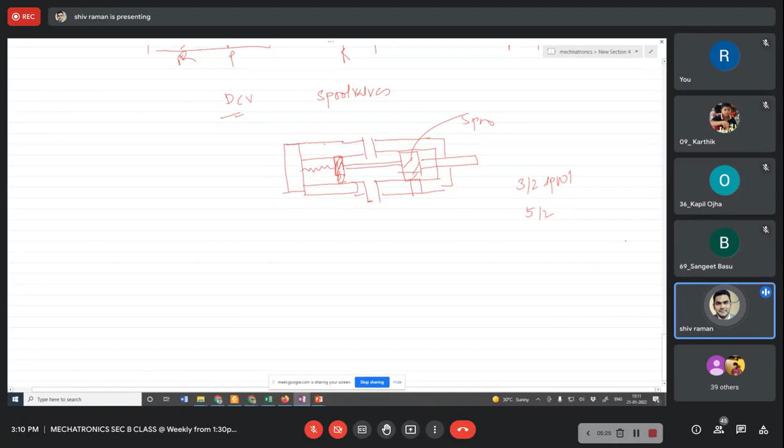Next is your DCV valve as a processing element. As we covered, DCV is used for sensing, processing, and power element. So next is your processing element.

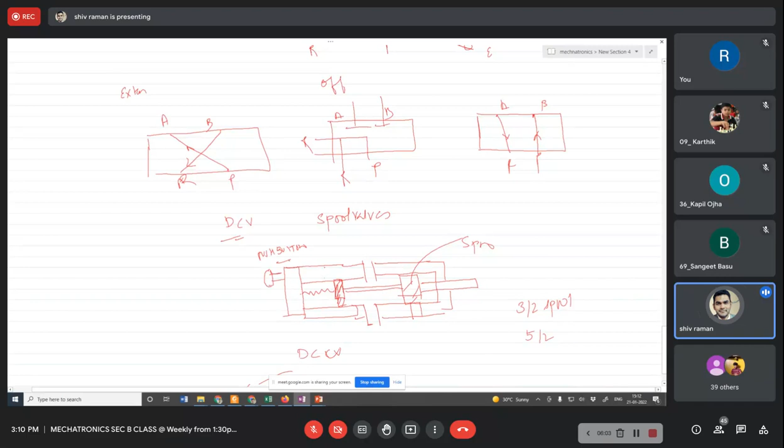Coming to the sensing of DCV, this sensing is governed by the action of one button, that is a push button. Apart from that we use other types of buttons also, I will show you in the symbol. So through the position of this push button, on or off, this DCV valve sends the signal and it will operate - so DCV valve as a sensing unit. In case of a processing unit, in order to process, this has to follow certain logic, so we call it logic valves.

Basically what it will do is generate, cancel or redirect signal based on logic values. In electrical or electronics, we generally have 0 and 1. Based on this 0 and 1, we create logic gates - OR, AND, NOR, XOR - but we generally deal with OR and AND type of valve, which work on these two principles. First we will cover OR.

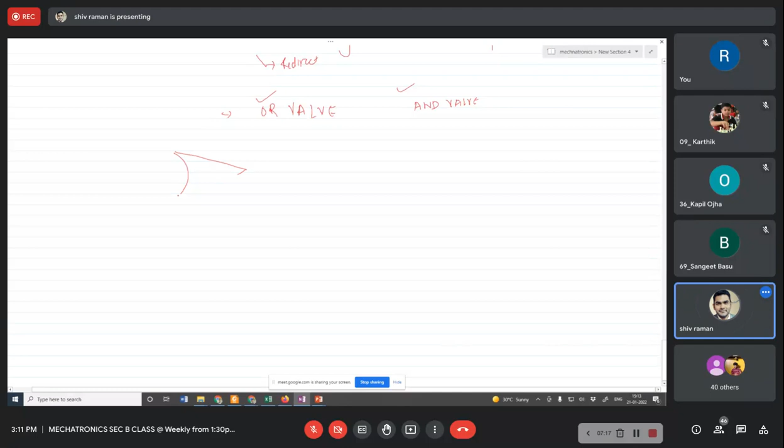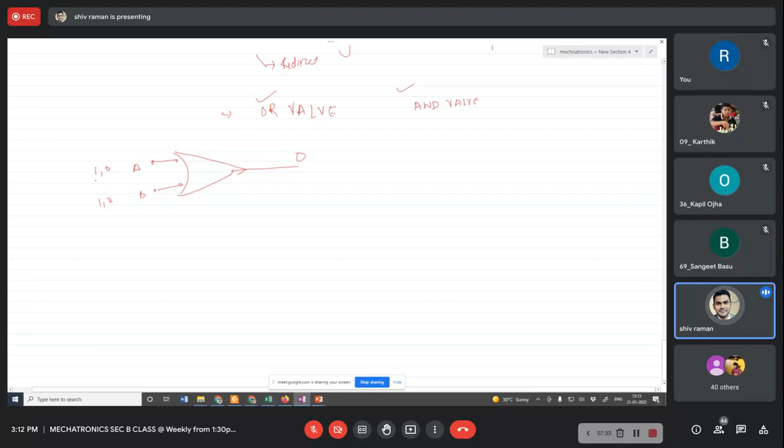If you see the function of OR, you have the OR gate symbol. This is your output unit, and this is your input A and B. You can have combinations like 1 0, 0 1, or others. So basically, this is what OR will do.

Coming to the input signal, let's say you don't have any signal at the input - 0 0 means your output will be 0. When you are having 1 0 or 0 1, the output will be 1. So if there is input in any of the ports, the valve will operate and produce the output. That is your OR valve.

If you see the schematic diagram of the OR valve, this is a simplistic OR valve. This is your slider. When you have a signal from this port, let's say this is B, signal from port 1, due to this pressure, this piston will move and close A. So at A the signal will be 0, but the output at C port, this pressure will be transferred through this and you get an output. When you have a signal at A 1, this will slide here.

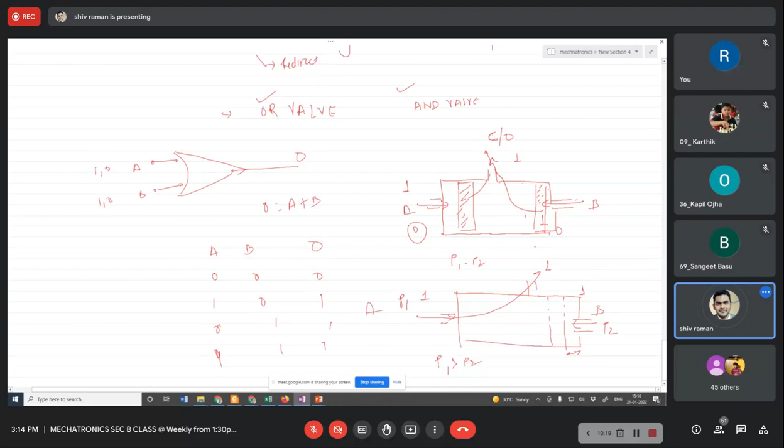That is how your OR gate, or OR valve, is operating. If you see the symbols, they are very much important in cylinder sequencing, so you have to be very careful about them whenever a question comes - you have to be very specific about the symbol and draw the right symbols while doing the sequencing. Since the exam will be online, you will have sources to help with that, but still I suggest you go through the symbol chart, which I will share in this presentation.

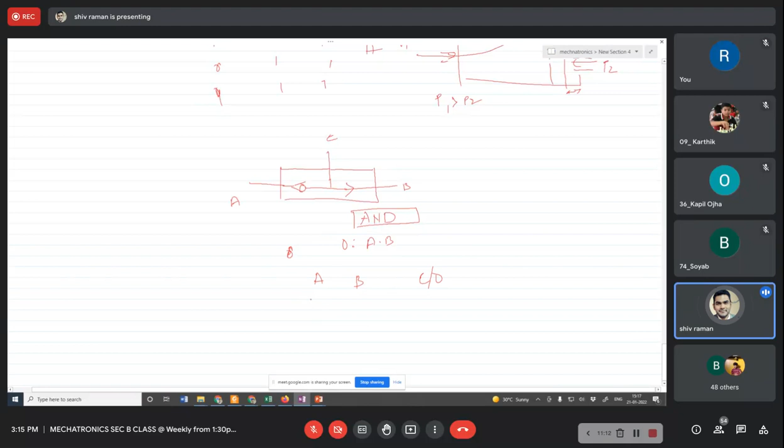Then we have AND. AND will work on A into B, so output C: 0 0 gives 0, 0 1 gives 0, 1 0 gives 0, 1 1 gives 1. So whenever there is an input in both ports, only then will your AND valve operate.

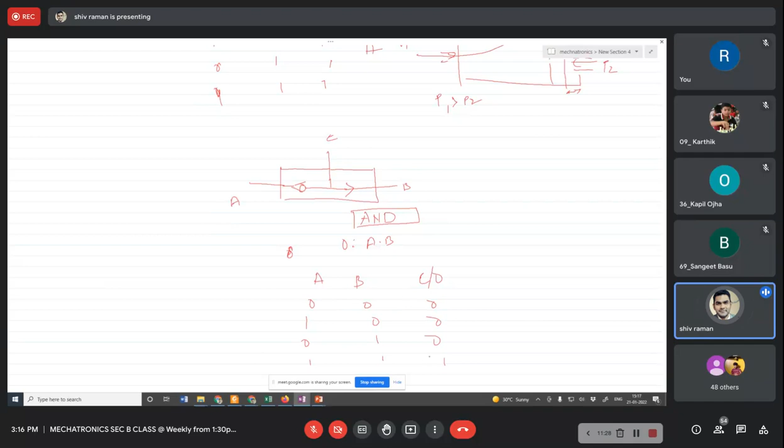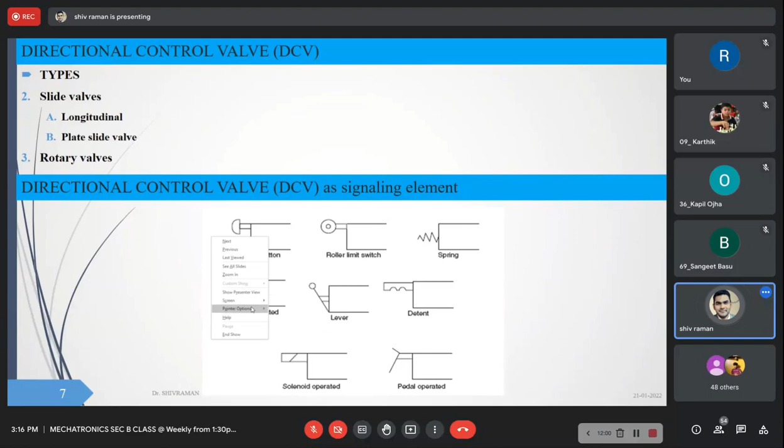Let me show you the schematics of this one. This is the directional valve as a signaling element. Through any of these signaling elements like lever, roller, switch, or spring, you can supply the signal to the DCV valve. Generally we have this push button, so whenever you draw a DCV valve, you can draw this push button showing that the signal is transferred to the DCV valve from this particular signaling element. Then we talked about OR.

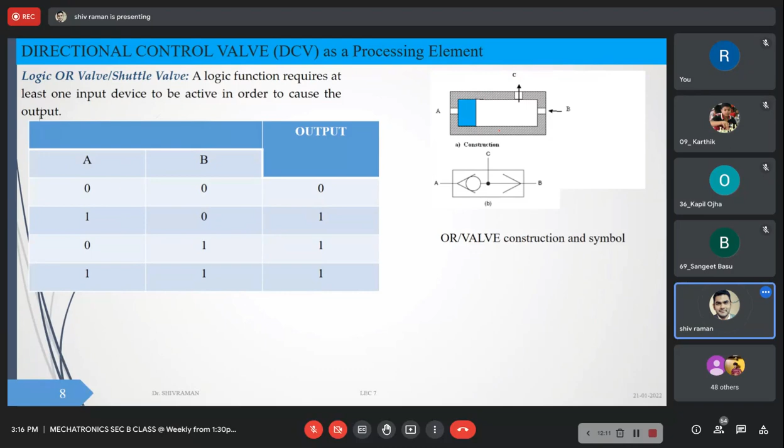So this is how the OR construction looks like. Okay. Now coming to the AND. So this we have discussed already. But here you can see, okay, this schematic is not correct. It should be somewhere here. This, okay. I have taken from the book, but this is not correct. If you have signal from this point, then only it will transfer. Otherwise, this spool position will block one of the port and finally the output. Okay.

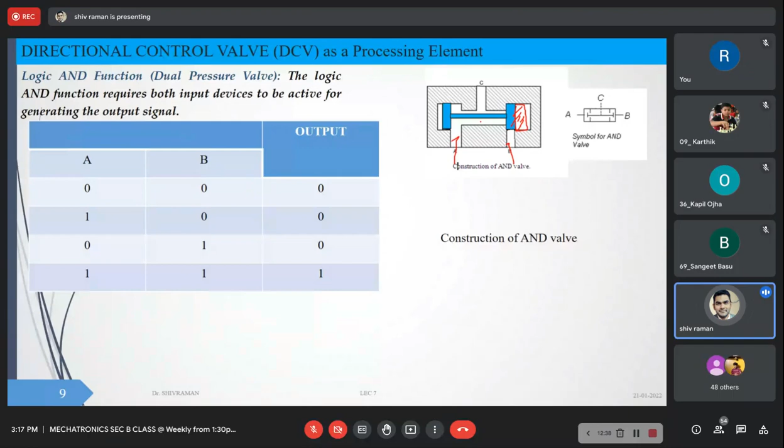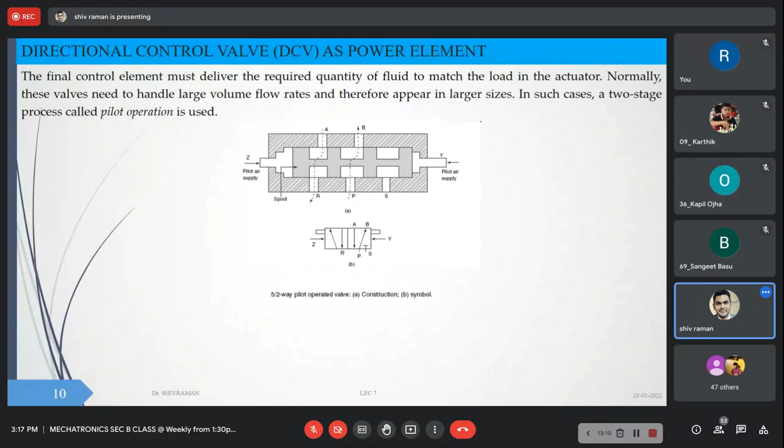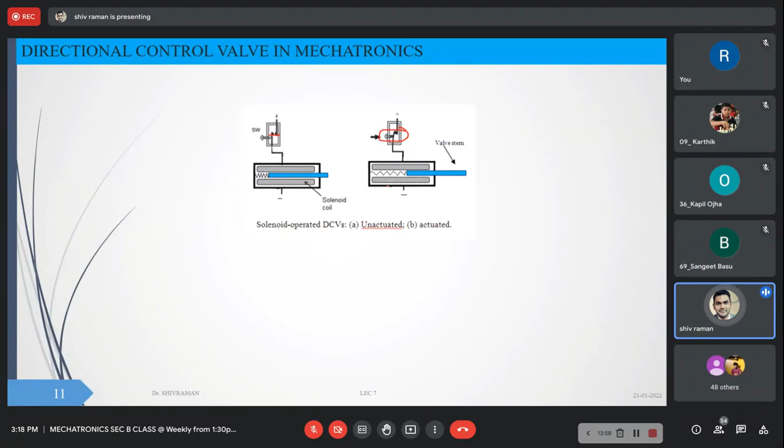Okay, so generally, in your cylinder sequencing, we will be covering push button type DCV valves. Okay, but for this solenoid valve, we will cover one question so that you can understand how the solenoid valve is actually working.

Okay, so before going to the cylinder sequencing, it is very important to understand the symbols, what symbol sketch needs to be drawn in order to create a pneumatic or hydraulic circuit while designing any mechatronics system. Okay. So basically a symbol is used to display certain characteristics like function, actuation, number of connections, switches we are using, what flow path will be there. So it can be realized with the help of these symbols.

Okay, but the symbols are not the real representation of size and dimension. It will not tell you which manufacturer it is, because it will be a generalized circuit diagram with the help of symbols and characters. Okay, so it is not related to any particular manufacturer, and also it will not provide you any physical detail, what power or what input or what current voltage is acting as an input to operate the system.

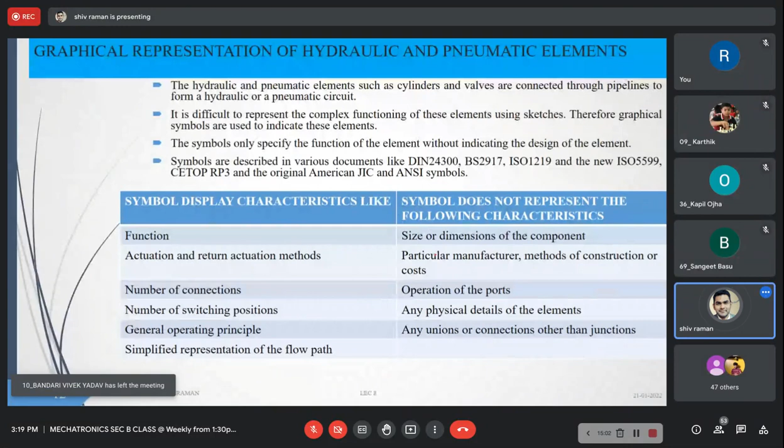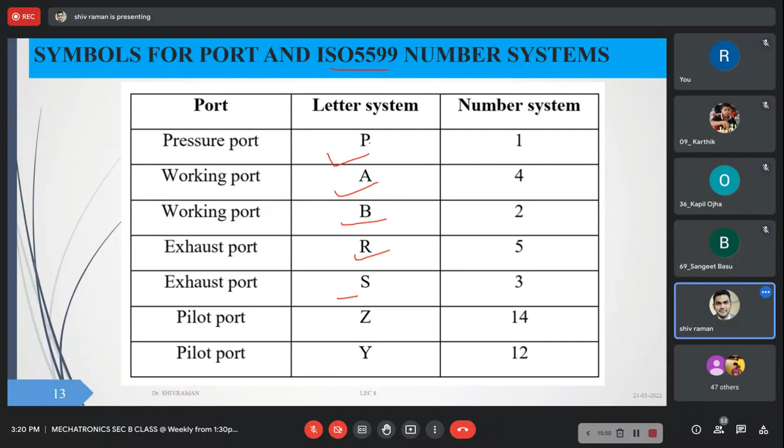likewise, any service unit like air filter, lubricator, dryers, or any other cleaning component which is required to clean the air or fluid from the impurities. Okay, so these are the symbols which need to be used. Okay,

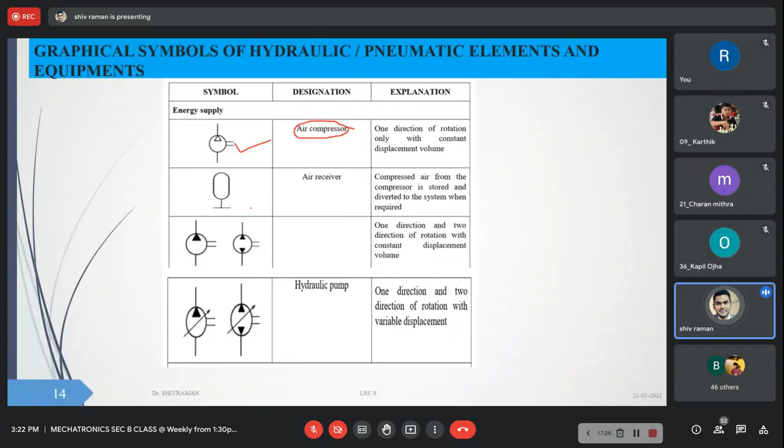but see, in my case, your circuit diagram needs to be correct. Okay, if you are not using any service unit or anything, it is not important, but you should be very careful about this hydraulic pump and compressor. So in a question you should be very careful about what circuit you need to draw. Okay, so these are the symbols for directional control valve.

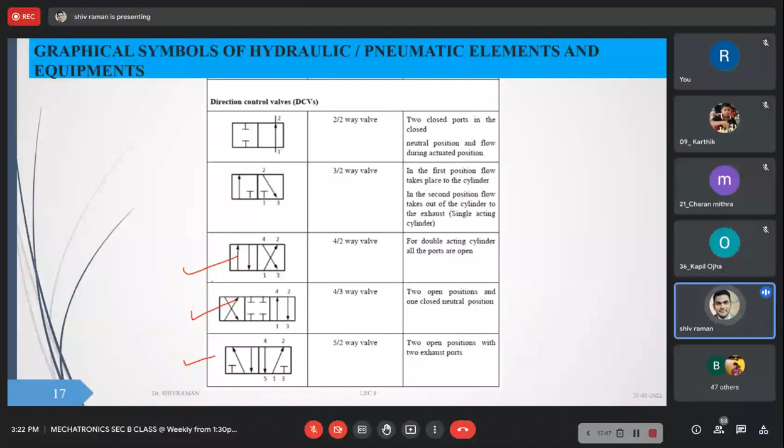It is 2-2 valve, means two function, two port, 3-2 valve. Okay, 4-2 valve, 4-3 valve, and 5-2. So for your convenience, you should remember these symbols. Okay, these three symbols are very important because most of the hydraulic or pneumatic circuits will be using any of these three.

And in actuation I am not very restricted about actuation. You can use any of this one, but you can use push button or spring actuation. Okay, any actuation system you can use. But this symbol you need to understand, these are the symbols. Anyhow, when you are referring in any real time situation, this symbol chart is available to you so that you can understand which type of actuation method is used for the directional control valve. But in our case, you can stick to push button or spring actuation.

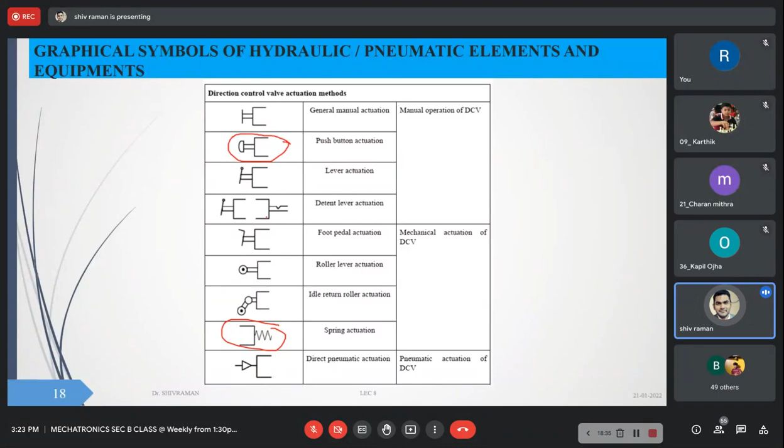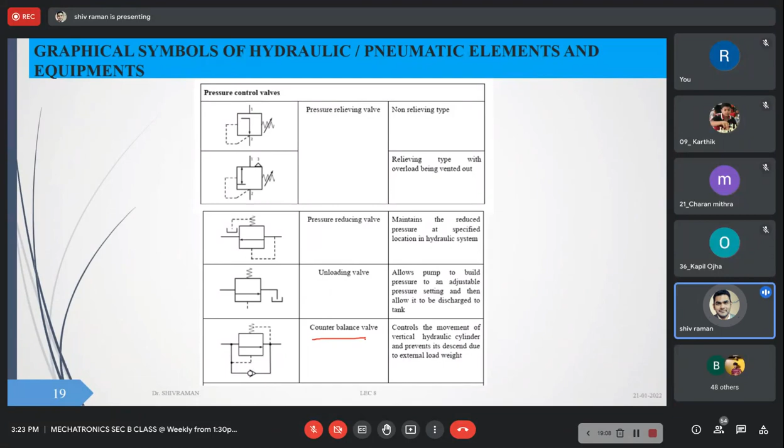These are pressure control elements. So these are extra elements which are required. Apart from fluid flow, we have to relieve the pressure. We have to be very sure that the pressure in the hydraulic or pneumatic line should not cross the upper limit. And likewise we have to have an unloading valve to remove the excess liquid towards the sump. We need to have a counterbalance valve which will control the free fall of the weight. Okay, so these are the symbols.

So we'll start with a simple cylinder sequence, which is a single acting cylinder that extends upon the operation of a push button. So it is actuated by a push button for transferring a part from an equipment. The cylinder remains in extended position as long as the push button is activated. So actuation is carried out with the help of a push button, and the piston will retract as you release the push button.

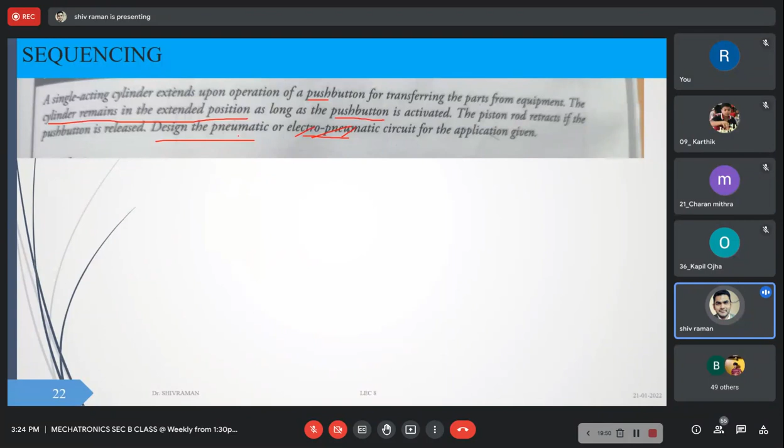So you have to design a pneumatic or electro pneumatic circuit. So this is not important. You have to design either pneumatic or you can draw a hydraulic circuit for the application given. So here it is asked pneumatic, so we have to draw a pneumatic circuit. So basically you have a single acting cylinder, means you have a single port here, and another one is you have a directional control valve which is actuated by a push button. So you can draw a directional control valve. It is controlled by a push button.

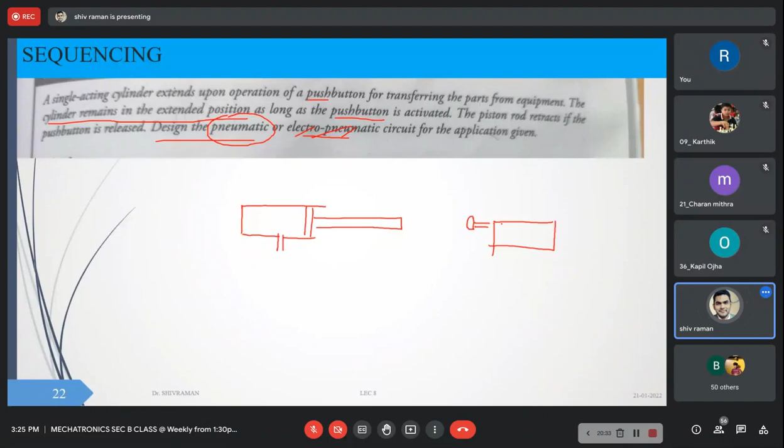So in order to govern the opening and closing of ports, this push button will activate what? Spool. Either the spool will be here or here, that we will decide. So how it is working: it is extended when the push button is pressed or activated, which means we have to supply from the pressure port. Extension will be in this direction, so we have to supply from the pressure port. So when the push button is activated, your spool position will open this pressure port. So when the push button is activated, the connection will be in this direction, we will draw here. So the connection will be this, and these two ports B and R are closed with the help of a spool.

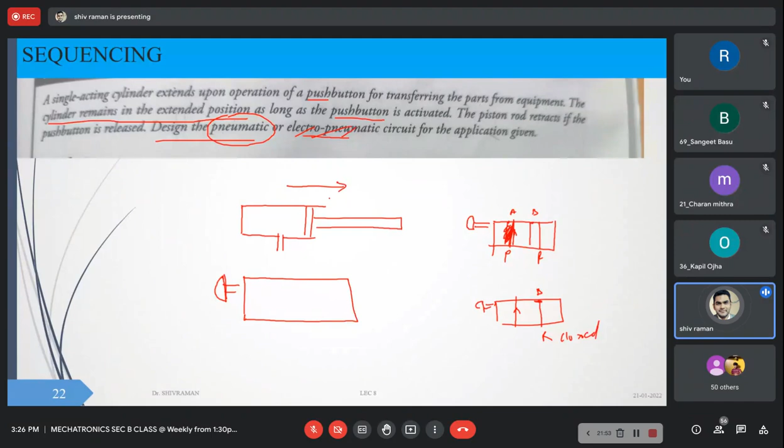So how will the circuit look? Initially we have to retract the cylinder so that we can remove or expel out the gases. So our first will be retraction. First retract. So in order to have a retraction, what can be done? You can use a single port here or a double port. It's your wish, but as it is a single acting cylinder, you can use a 3-2 DCV valve. Okay, 3 port 2 function.

So this port will be connected for the retraction. The direction will be here. During retraction, your R port should be connected. So this is connected, and your spool position is here. Means P is closed. When you push the button, it will get activated. So you have a compressor here to supply the high pressure here. So when the push button is activated, what will happen? Actuation.

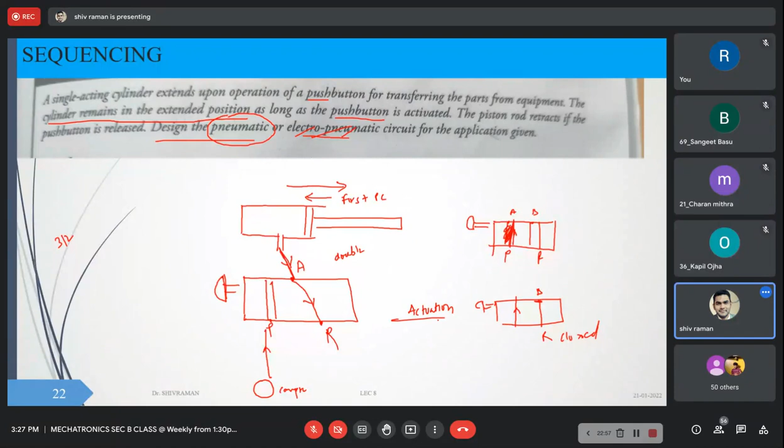In actuation, when the push button is activated, your pressure line will be in connection with the input port, and it will result in the extension of the cylinder. This is P, this is R, and this R port is closed. This R port is closed, and it is connected to a compressor. So this is how your circuit will work.

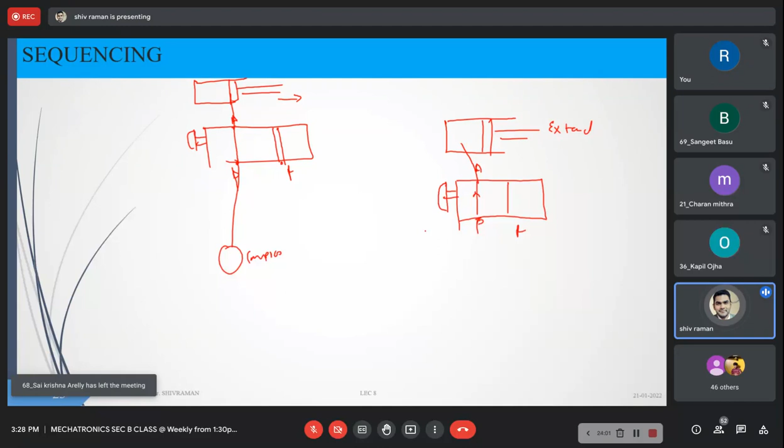And if you want to draw the circuit diagram, how will the circuit diagram look? You have the push button, you have R here, P, R, A, and this is the port, extend. So this is a simple pneumatic circuit of a single acting cylinder.

Likewise, you have a conveyor belt which carries the finished product. A double acting cylinder is used at a transfer station to remove the finished product from the conveyor belt. When the push button is operated, it will remove the finished product in actuation, and at the point where the push button is released, it will return to its original position, meaning retraction. So you have to design a pneumatic circuit.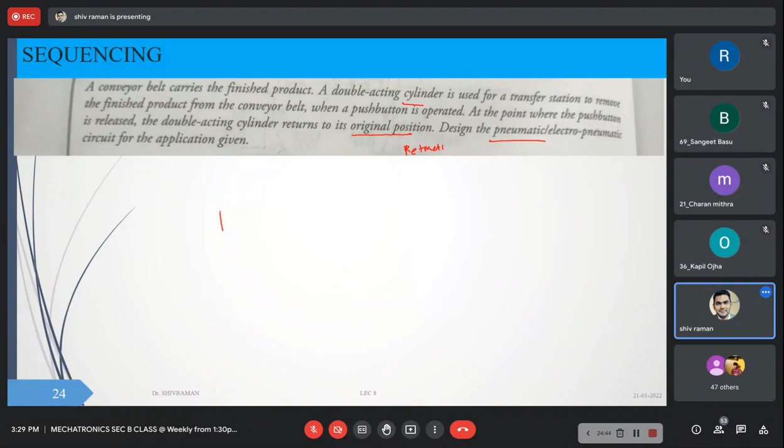So it's a double acting cylinder. For a double acting cylinder, in order to act in both directions, it should have two ports, two inputs. So in order to connect these two inputs, you can use a 4/2 DCV, which will have 4 ports and two functions, that is extension and retraction. This is your pressure line. This is your release. And it can be actuated by the push button.

So when the push button is activated, it will transfer. Push button activated means the pressure line and A should be in connection, and this port will be closed, or through this port your gases are released. Sorry, I'll cross this. So when the push button is activated, your pressure line is connected, A and P, and this port is closed, that is B and R. So this pressure line will result in the extension.

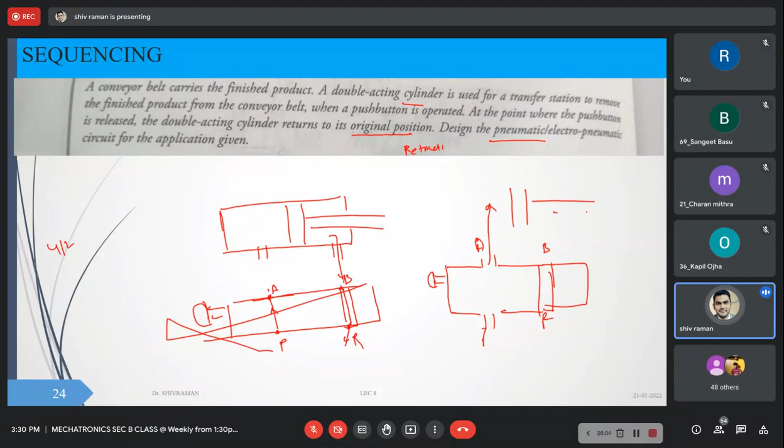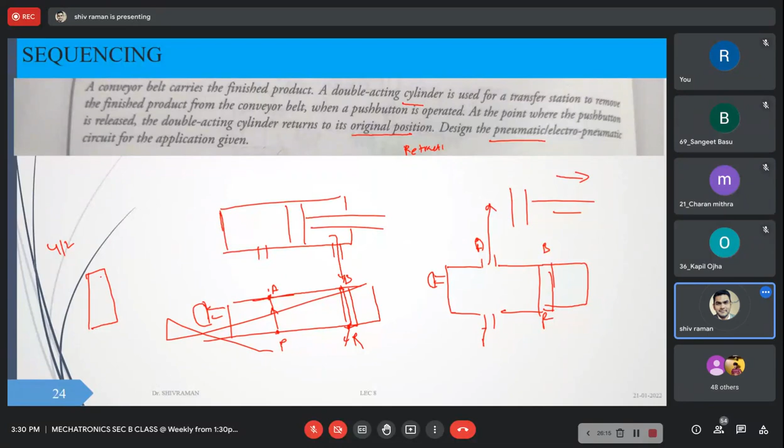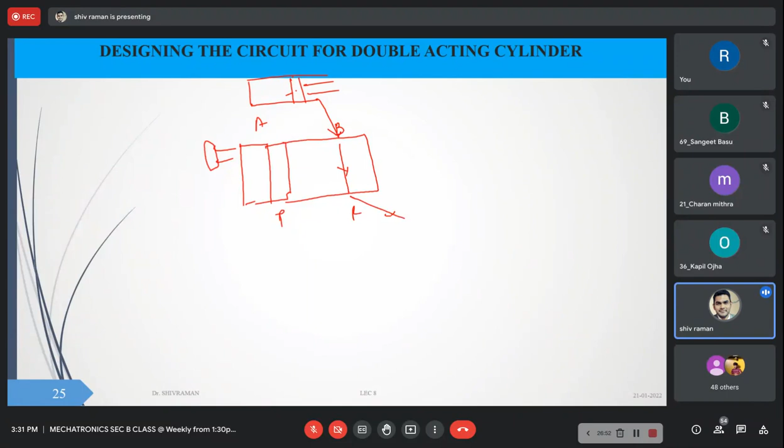And when your push button is released, what will happen? This line will be closed. So when the push button is released, your pressure line will be closed, P and A, and your B port and R port are connected. It will be expelled to the atmosphere, and the cylinder will be retracting. This cylinder will retract. So this is the double acting cylinder.

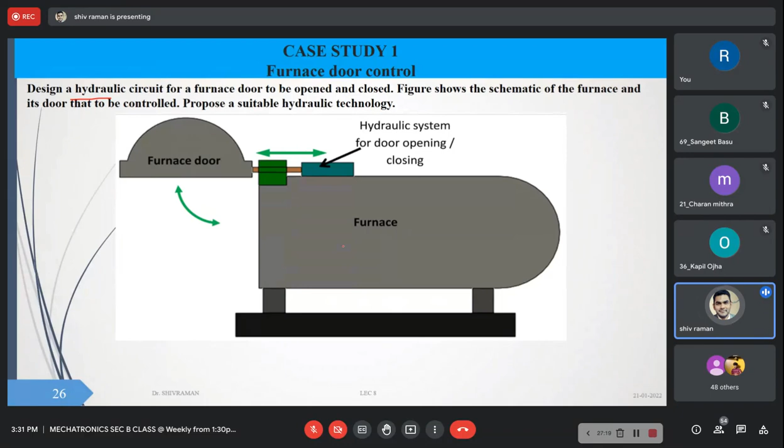So likewise, design a hydraulic circuit for a furnace door open and close. The figure shows the schematic. With the help of a push button, when you press the push button, this furnace door gets activated and it will lift. And when it is released, it will come back to its original position. So this is how the circuit diagram will look.

It has pressure relief valves at different positions, or safety valves. But if you draw it without them, it's fine for me. But the circuit should signify the proper functioning. So here we are connecting it to a sump, since we are using a hydraulic system. So this port will be connected, A and B are connected, and it will come back to its position. And these are the pressure relief valves. If the pressure in the line is high, it will be released towards the sump. We will cover this in more detail.